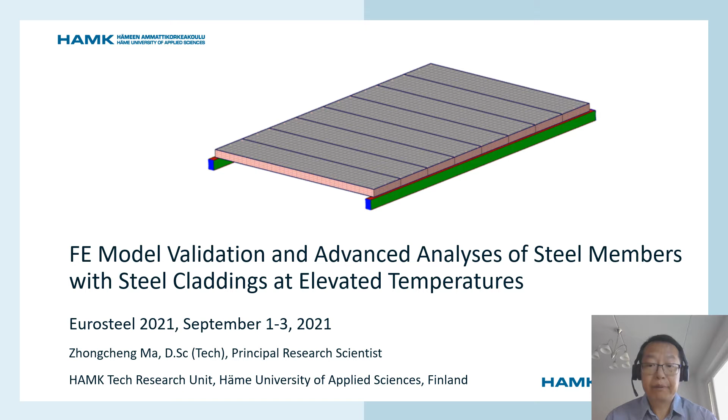The presentation is divided into 4 main sessions: Introduction, FE Model Validation, Advanced Structure Analysis, and Conclusion. I will first go to the introduction session.

This is a one-story industrial steel frame building with steel cladding. Typically, in Finland, sandwich panels are used as wall cladding and trapezoidal sheeting plus insulation as roof cladding. The system is subjected to vertical snow load and horizontal wind load.

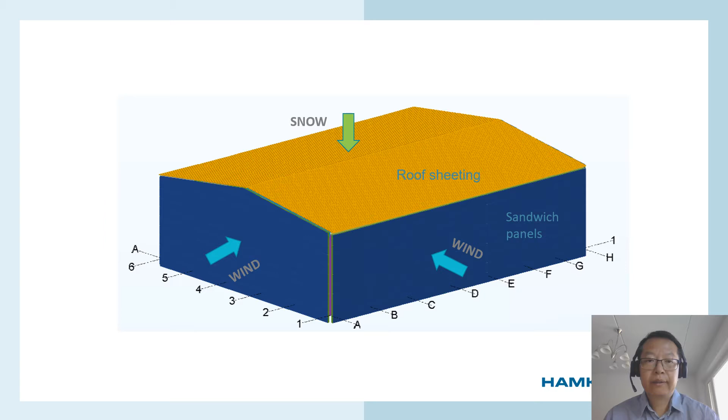Recent research has shown that the steel cladding system is capable of providing in-plane support to columns against minor axis buckling, and therefore increases buckling resistance at normal temperature. This was a research topic in previous work by the EASIE Project and Hedman-Pétursson in her dissertation.

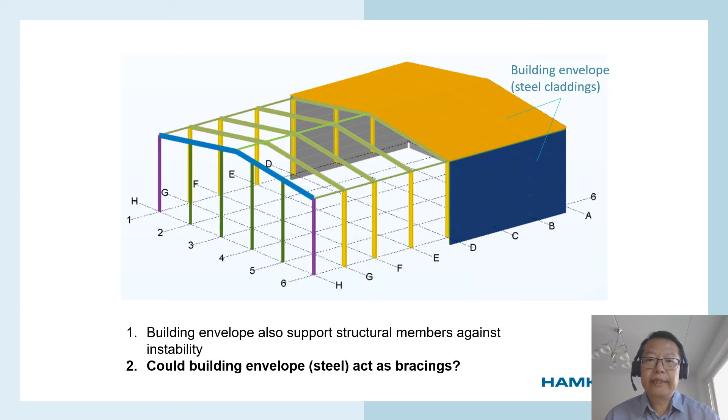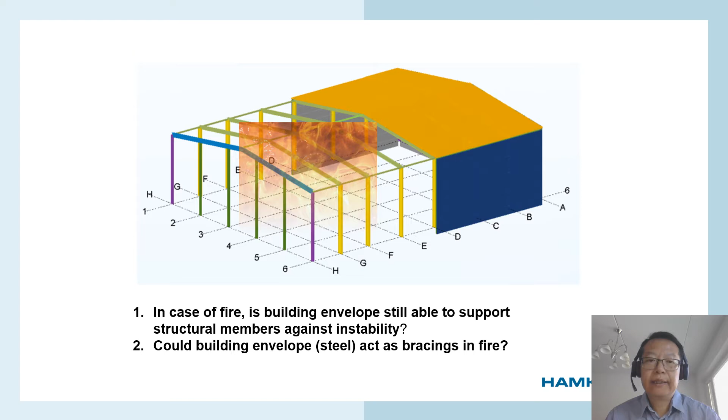What about in case of fire? Are there stabilization effects for individual members and the entire building against wind and catenary actions from snow load? We answer the first research question in this presentation and the second question in another presentation.

The project consists of 9 work packages. Work packages 2 to 4 are the testing part and 5 to 6 are the simulation part. Work package 5 is regarding the simulation of tests, and work package 6 is the simulation of the entire building, which includes the stabilization of individual members at elevated temperature and the entire building in fire.

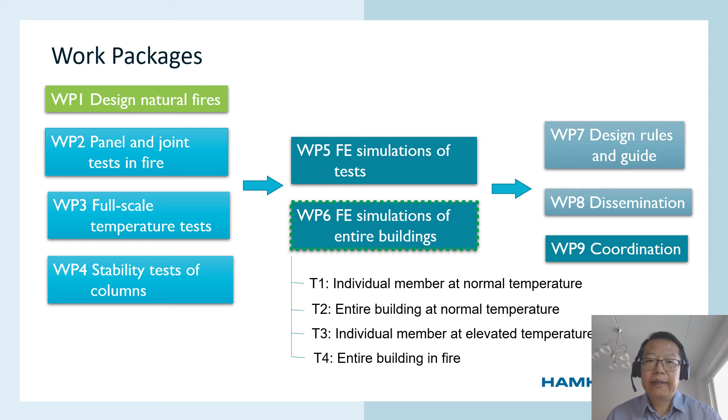Task 3 is regarding the stabilization of individual members at elevated temperature, and the research results are presented in this paper.

Now let's move to the second session, FE model validation.

The left picture gives an overall view of the test arrangement. The specimen consists of 3 steel columns, and the sandwich panels are connected with the steel columns using self-drilling screws. Compression forces are applied to the central column by 2 cylinders using a load distributing element. Additional uniform bending moment is applied by a separate cylinder with a specified eccentricity.

The inner face of the sandwich panel and central column are heated using electric padding. The eccentric load is set as 10% of the axial load, and the eccentricity is about 75 centimeters.

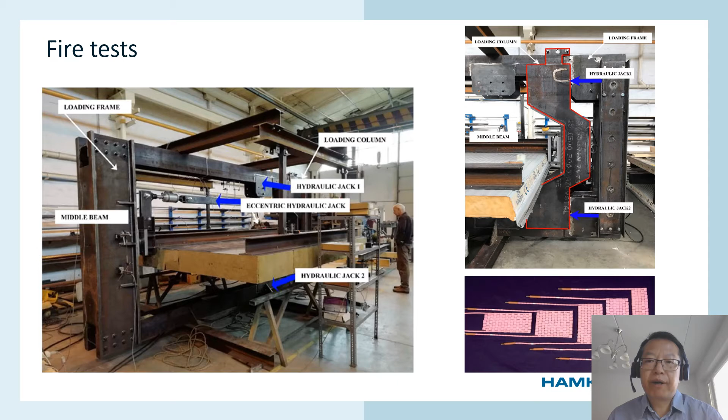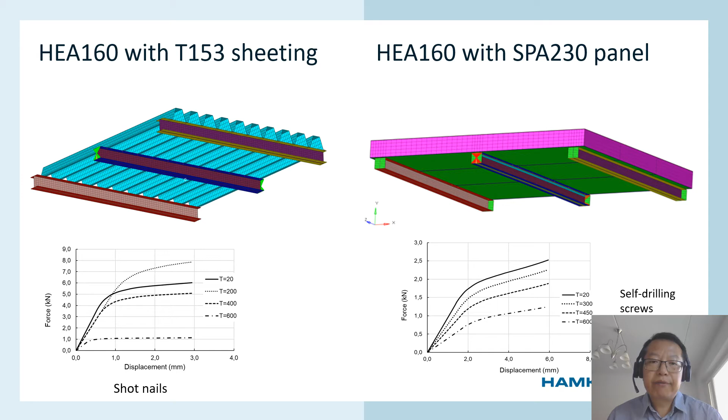Two model structures have been simulated. The left picture shows a FE model for steel beams with trapezoidal sheeting cladding, and the mechanical property of shot nails at elevated temperature. The right picture shows the sandwich panel cladding and the mechanical property of the self-drilling screws at elevated temperature.

At the time of simulation, we only knew that the steel column has a grade of S355. Therefore, 2 yield strengths have been used in the simulation: 410 and 450 megapascals, which are typical values for S355.

The actual measured yield strength is 460 megapascal in the flange in the later tensile coupon test.

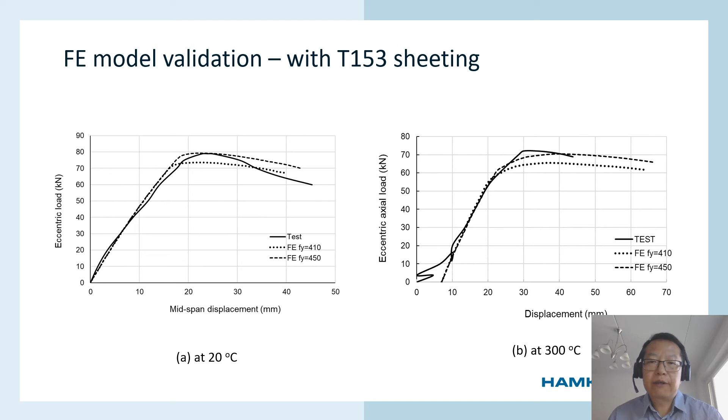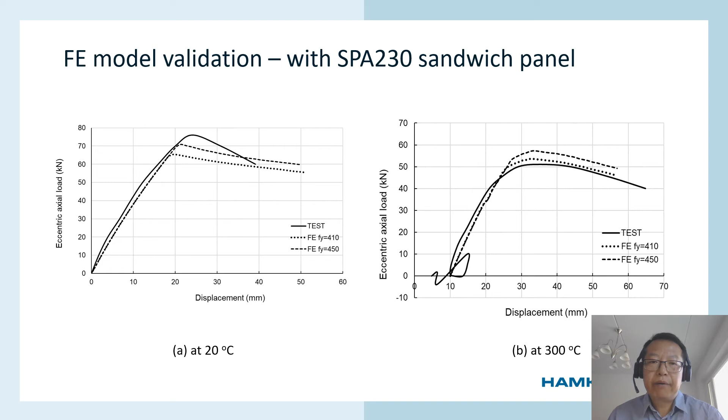For sandwich panel cladding, the simulated peak load is 7% lower than the test at 20 degrees and 12% higher at 300 degrees. The simulation agreed well with the test for elastic stiffness.

The effect of geometrical imperfection and residual stress is further investigated. The dotted curve in the right picture shows a load displacement curve with imperfections. The peak load is around 5 to 6% lower with the specified imperfections.

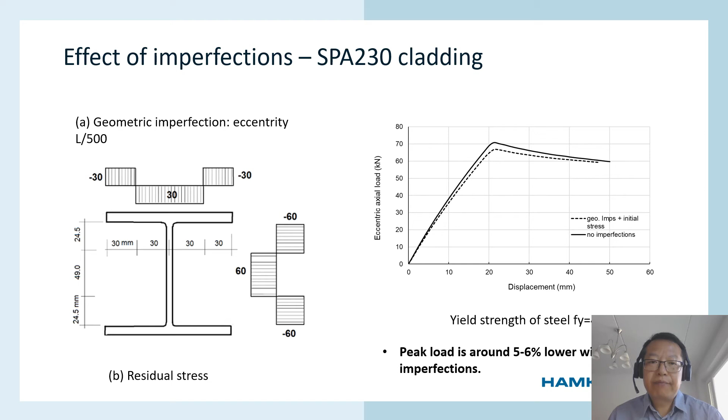Next, we will go to the advanced structure FE analysis session. Let's take a look at the resistance capacity of the compression member at elevated temperature.

Here are two columns connected by sandwich panels subject to axial load. The stabilization at ambient temperature has been studied by Hedman-Peturssen.

The FE model developed by the author has been validated, and both geometrical imperfection and residual stress are included in the FE model. The analysis at fire has been performed to investigate the load-bearing capacity.

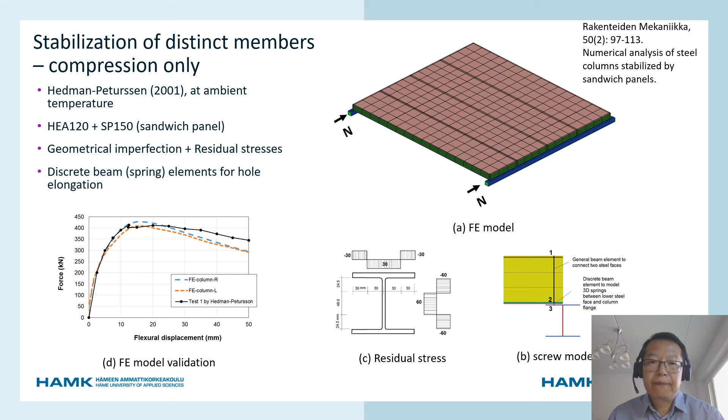Here are the results. The leftmost column is the ISO fire exposure time. There is a specific temperature profile corresponding to each fire exposure time. The rightmost column is the load-bearing capacity of the column without sandwich cladding.

In the case where no delamination is taken into account, the load-carrying capacity of the steel column is twice that of the case without cladding. With delamination considered, the load-bearing capacity increased 25% to 100% due to the presence of sandwich cladding.

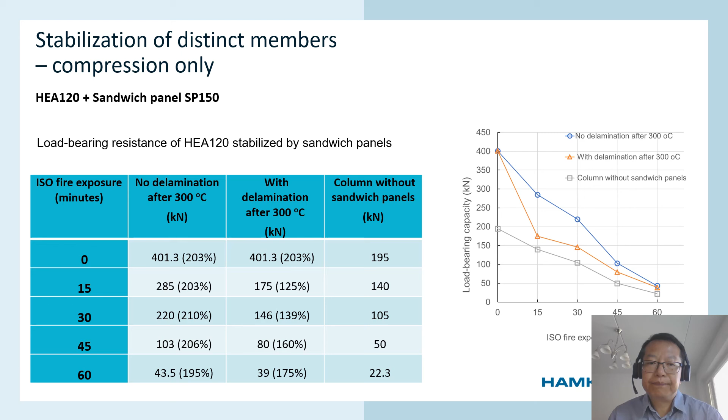Two types of steel cladding, Ruukki T153 trapezoidal sheet and Ruukki sandwich panel, have been investigated. A common beam column with both axial load and bending moment.

Load ratio is about 0.28. Geometrical imperfection in the minor axis is taken into account, and the delamination of the inner steel face from the mineral wool core after 300 degrees is also taken into account in the analysis.

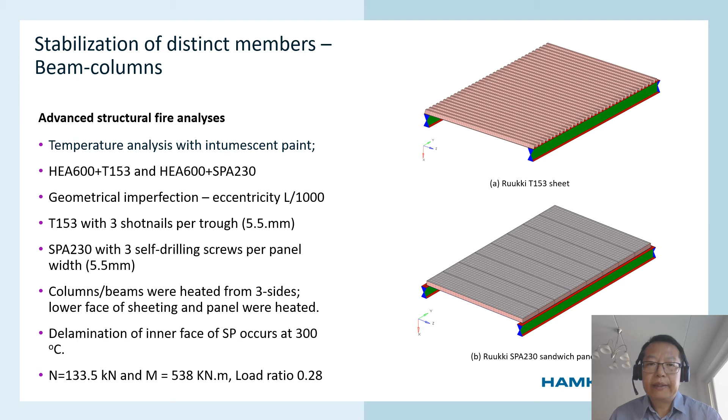Upper dark curves are for the case where the steel cladding is connected with the tensile flange of the steel column. Lower green curves are for the case when sheet cladding is connected with the compression flange.

It can be seen that the steel cladding increases the fire resistance when connected with the compression flange. There is no significant change in fire resistance otherwise.

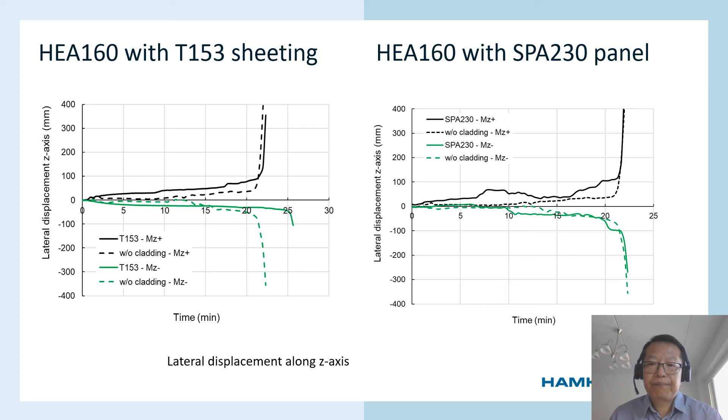The fire resistant behavior of steel members is different when the steel cladding is connected with the column at the tension flange versus the compression flange. For T153 cladding at the tension flange of the steel member, the increase is insignificant, around 0 to 8%. For cladding at the compression flange, the increase is around 11 to 13%.

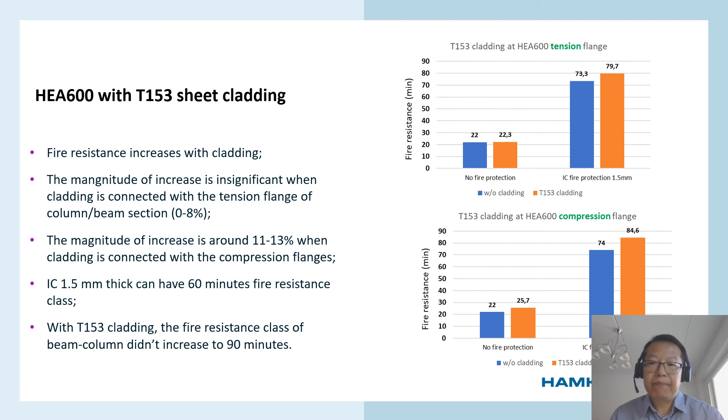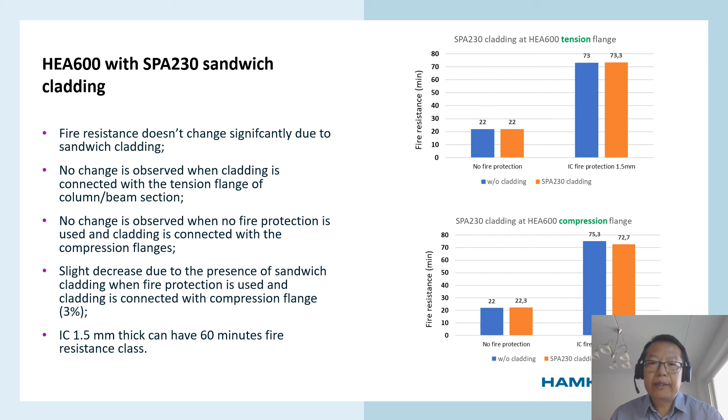At the compression flange, there is a slight decrease due to the presence of sandwich cladding. This reduction is around 3%.

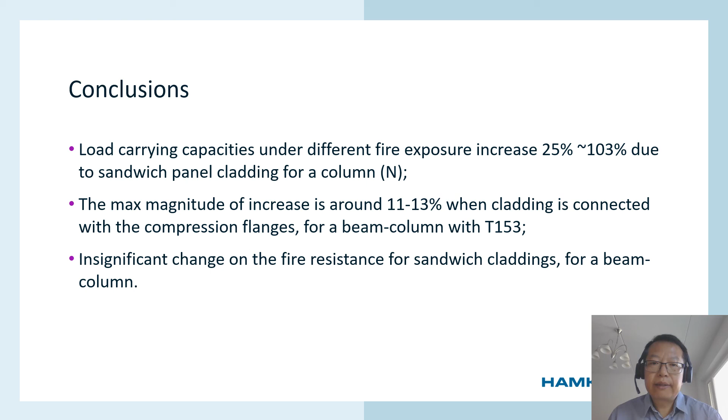Insignificant change in the fire resistance of sandwich cladding for beam columns.